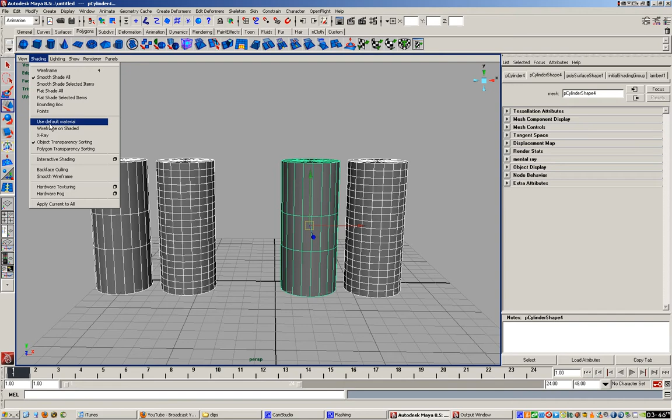Another thing I want to point out right up front, a couple of things actually. When you're working with skeletons you do have to be drawn in the side view, or not necessarily the side, but in one of the orthographic views, just because it makes things a lot easier. It may be helpful when you're working with a skeleton inside of a character to go to shading and down to X-ray so that you can still see the shapes, but see through them so you can tell exactly where your skeleton is.

So if you're looking at this and you say, what the hell, why is the cylinder see-through? That's because I went to shading and turned on X-ray. It's something I recommend for working with skeletons.

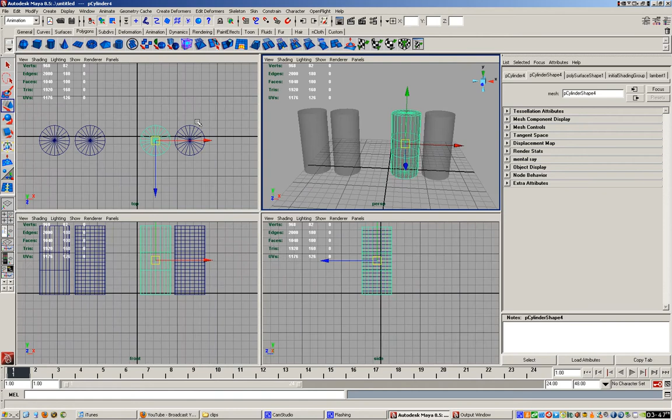Now, when you're working with skeletons, the reason I say they should be made in one of the orthographic views, top, front, or side, is as such. If you go to the animation shelf, there's this blue button here that is called the joint tool. That's for putting in skeletons. That's the one we're working with in this video.

Or you can go up to skeleton and down to joint tool on your animation menu set, which the keyboard shortcut for is F2. Okay, well, I'm just going to grab it off my shelf, click the joint tool.

Now, let's just pretend that these cylinders represent a leg. So we'd have the hip up here, we'd have a knee in the middle, and an ankle at the bottom. So if I click once, I can put in a hip joint. If I click again, we'll put in a knee joint. And if I click again, I put in an ankle joint.

So from here, that looks alright. I'll hit enter to finalize the joint chain.

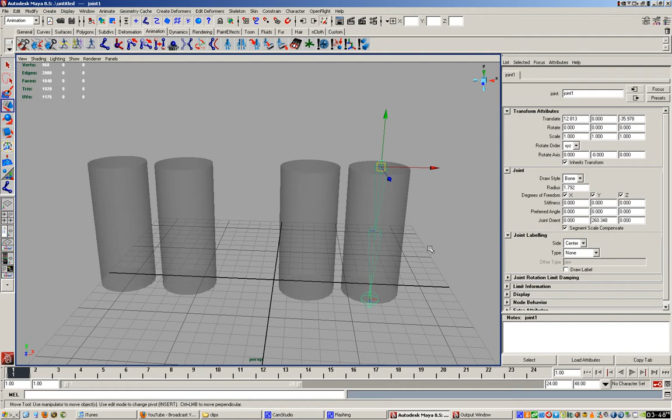Now, it looks like it's straight up and down, but like I said way back in the beginning, some things you just want to do in all 4 views, because now you can see I've got this huge leg that's definitely laying flat.

So, difference being, if I were to do it in the side view, I can just grab my joint tool, click one up where the hip is, one down where the knee should be, one where the ankle should be, and I put a little bend in there out of habit. You'll get kind of in the habit of doing that when you start using IK chains, which we'll explain later.

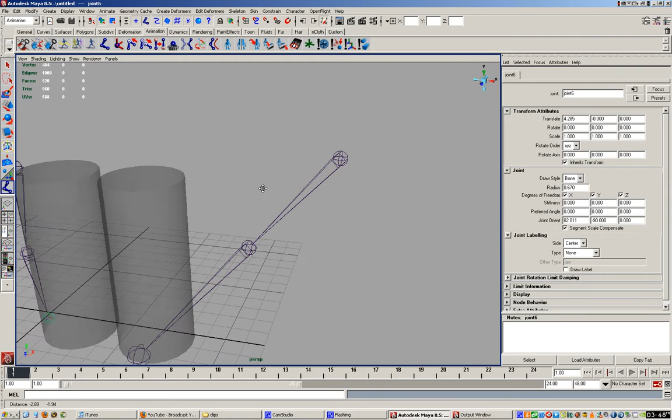Now all I have to do is grab my selection tool, hit enter to confirm the joint chain. Now, joints are set up in a hierarchy already by default.

The first joint, if you select the first joint, it will select the whole chain. If you select the second joint, it will select the rest of the chain. If you select the very last joint, it only selects the last joint.

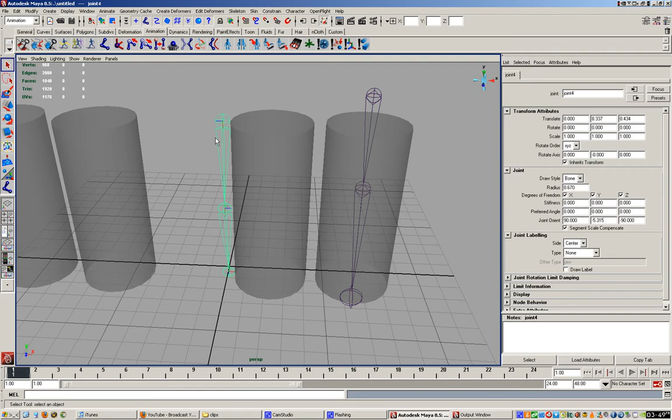So, I'm going to go ahead and select the first joint of that chain and move it into place about in the leg here. I'm going to go ahead and just select this one and get rid of it because I don't need it. So now you see, you can kind of see in the top view it's pretty well centered.

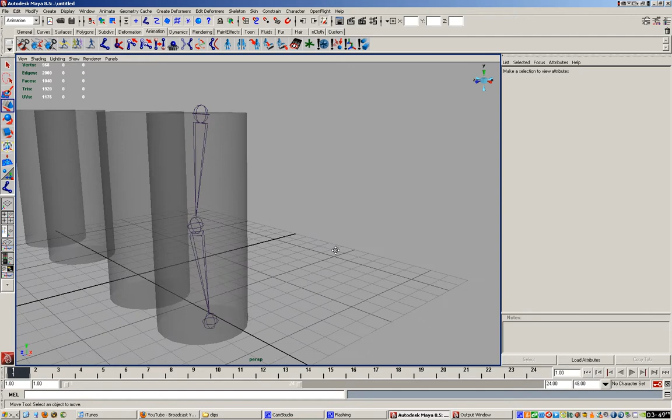So now let's have a look and see what exactly it is this joint is doing here. It's exactly what it looks like. The circles are joints, and basically these triangle tetrahedron things that go between them, the fancy word for pyramid things, are the bones.

So I put on my rotate tool and I have this one selected. You see I can sort of bend the joint here. So I could bend this, and then I could select this one, and I could rotate it up if I wanted to move legs and such, or what have you.

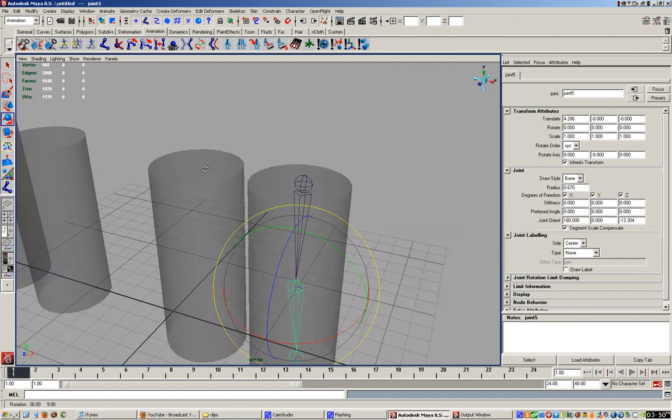But for now, we're just going to put that in the center of the cylinder. I'm going to select my joint chain, Control or Command D to duplicate it, put on my move tool.

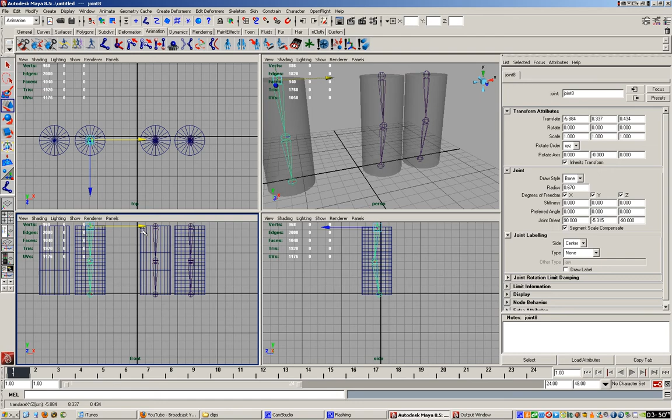Basically, I just want each one of these cylinders to have their own joint chain, so you can kind of see the difference. Okay, so now I've got joints inside of what should be legs or arms, cylinders with bones, because that's how I roll. On the animation palette or menu subset, there's an option for skin,

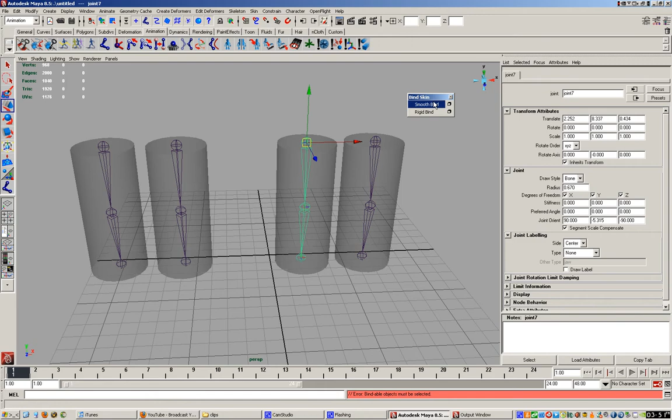and then you go down to bind skin. Oops, I didn't mean to click that, I meant to click this so that I can just tear that menu out. There's smooth bind and there's rigid bind. Rigid bind is what we're going to go over first, because that was actually the first kind of skinning that they had.

Let's see, you can actually see that I already bound on accident. When I clicked, I actually bound the skin to the skeleton. You can tell by the fact that it's multicolored. So I'm just going to go ahead and undo that, because I don't want to do a smooth bind just yet.

So I select my bones first, and then I select the object that they're binding to, and I'm going to go to rigid bind. I'm going to click on the little square so you can see the options, which are not so amazing. Bind method, it binds the skeleton to the closest point, the whole skeleton, instead of just the selected joints. Okay, I'm going to go ahead and hit bind skin.

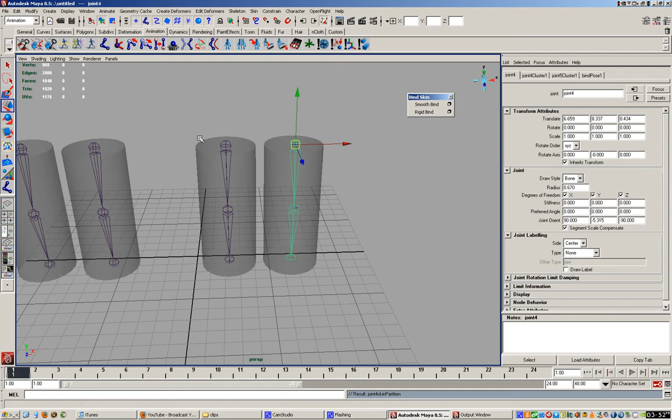So that was a rigid bind, and I'm going to do the same thing for this one. Okay, I'm going to go ahead and click rigid bind. Now you'll kind of see the difference. On this cylinder, I've got a whole lot of geometry, a lot of extra polygons because it's divided so much. This one, not so much.

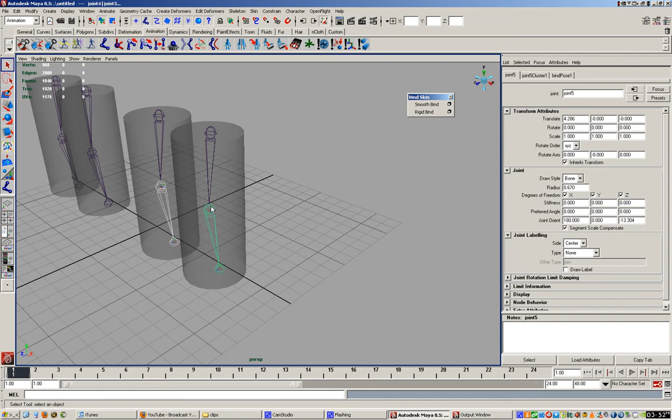So if I were to take this joint, this center joint, we're just going to rotate it. Actually, what I'm going to do is I'll rotate both of them. I'm going to select this joint, select this joint, and I'm just going to rotate them, and you can start to see what the difference is.

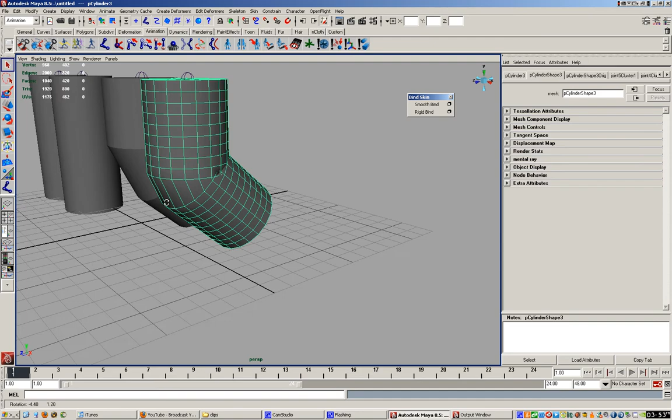Okay, for this, I will turn off X-ray, and I'm going to let go. So, you can see on the shape with the most geometry, it deforms in the center here, but it's a little bit smoother. A little bit. On this one, with not very much geometry, you can very much tell there's corners there. Okay?

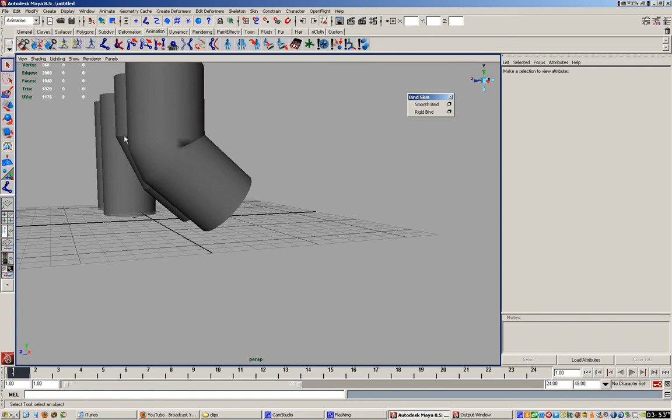So, I'm not really a big fan of rigid bind unless I'm working on something like a robot or something like that. But the more geometry it has to work with, the smoother it can make those curves look. Rigid bind really doesn't smooth a whole lot out anyway, that's why it's called rigid bind.

But on these two, I'm going to select it, I'm going to click smooth bind. It's got similar stuff in the options, just what do you want to bind it to, how do you want to bind it, etc., etc. I'm just going to click bind skin. I'm going to do the same for this one, smooth bind.

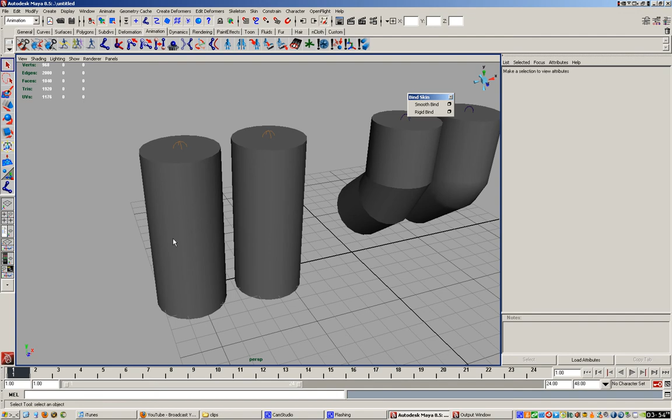And now you can see in the one with the geometry and the one with not as much geometry, we'll hit X-ray again and select the joints and rotate. Now we'll turn off X-ray so you can kind of see this. This is where it makes a huge difference.

Since I don't have much geometry in here, it can only deform around the edges here, or where the edge goes around the object. Since there's only two edge loops in the center of that object, it has to deform here, and it has to deform here.

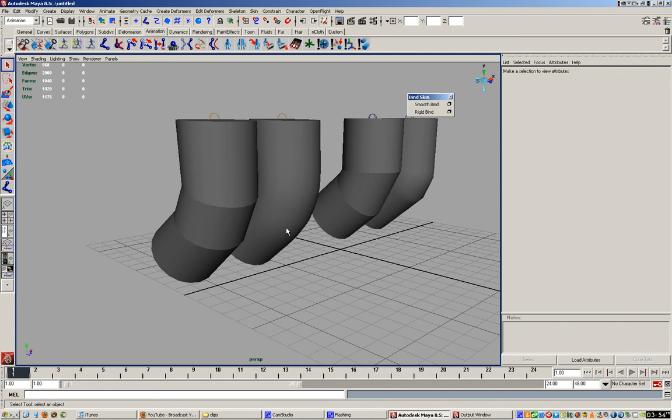On this one, what smooth bind is nice for, since I have a lot of geometry, it will kind of spread that out. So instead of just deforming around this edge loop, it sort of disperses it all the way around in a very much more organic way. So think about that when you start to model characters.

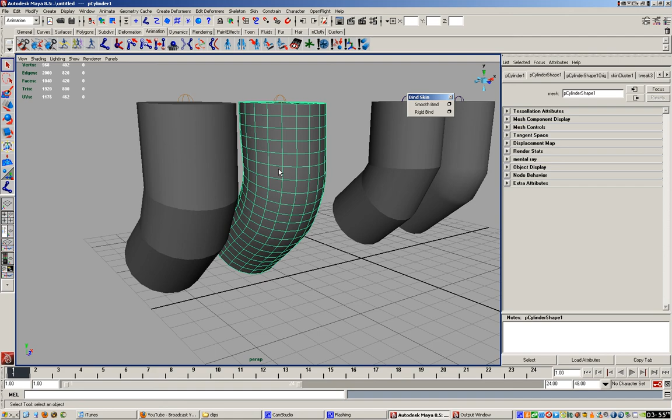You can either put in edge loops as you go along, or you can just make sure you have enough, depending how you're modeling, so that if you're putting in a skeleton, you can deform it and it won't look like the Tin Man over here or over here.

In the next video is going to be a surprise because I'm not quite sure what I'm going to make it on yet, so stay tuned.